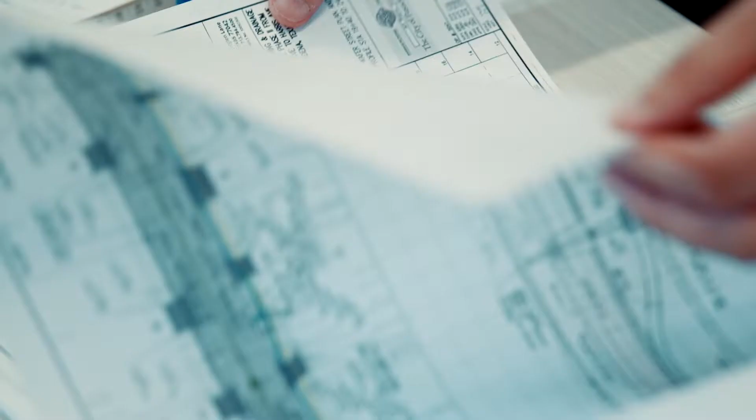Rise Communities wants to bring a master plan community that has tremendous landscaping, one-of-a-kind amenities, not to be compared to any other master plan community. It's unique. It's a community that you can drive through and feel like you're at home.

The services that Meridiana will use with EHRA is pretty much all of them: the planning and platting, the surveying, the engineering, construction phase services, landscape architecture. We're a one-stop shop, and they can use any of our services to get this project moving forward.

Meridiana is a development down at SH288 and County Road 56, and the project that my group has worked on is improving SH288 at County Road 56, providing a bridge overpass over 288 and removing the at-grade crossing for the development. Because we have so many services under one roof, one of the important things to observe in this project is the private and public collaboration.

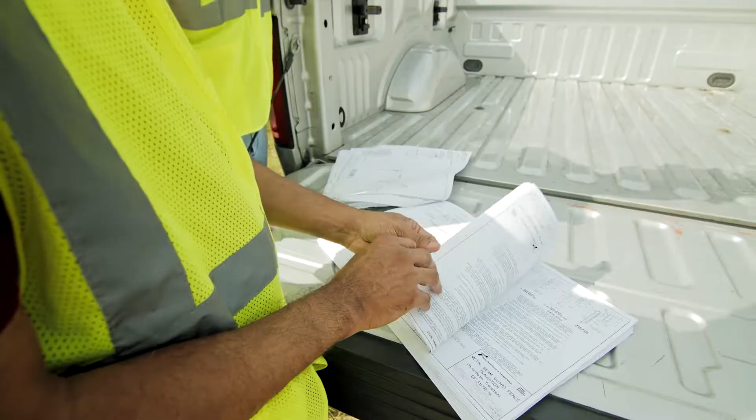Because this is a project with the developer, our land services group works with the developer day to day. We are working with Brazoria County, TxDOT, and doing this project, County Road 56 overpass over 288.

Rise Communities is looking for an engineer that looks out for their interest, as every developer should. Somebody that's going to value engineer, somebody that's going to bring a product that is going to work, drains correctly, is going to have water and sewer services, something that they're not going to have issues with in the future or currently.

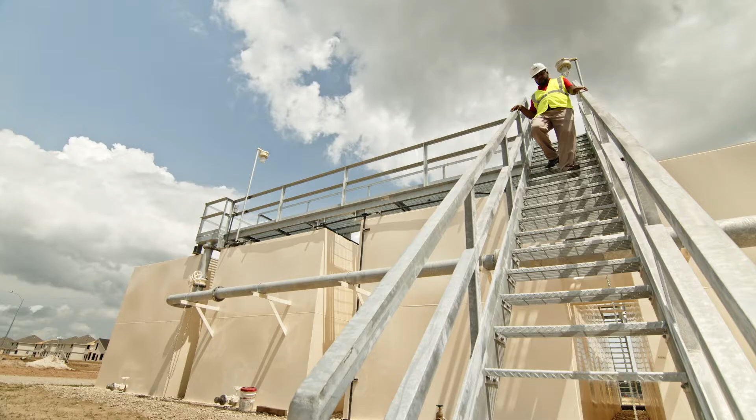In my opinion, the most challenging part of this project will be connecting our main parkway from State Highway 288 all the way through State Highway 6.

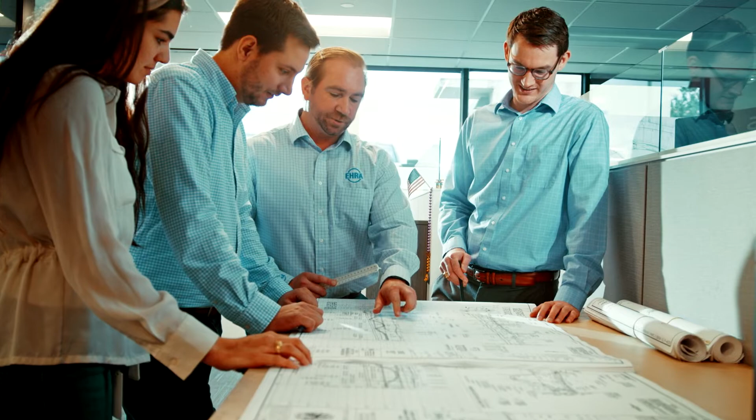I believe EHRA was awarded Meridiana because of our attention to detail and our responsiveness and our communication. Since this project happens to be in the TxDOT facility, we have to work with TxDOT. It provides not only traffic relief and connectability between 288 and State Highway 6, but it also provides safety.

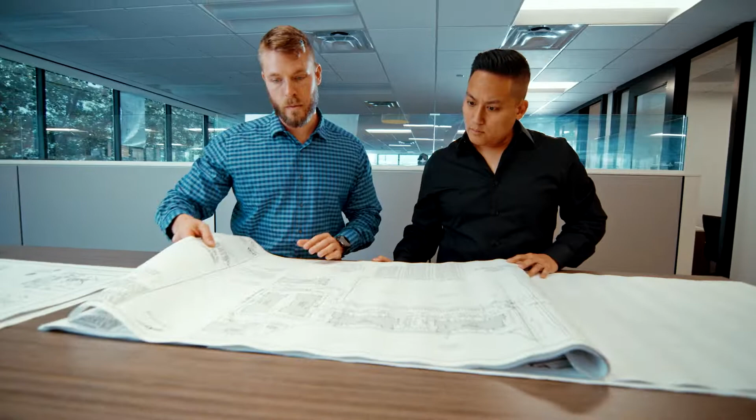I think the most challenging aspect of the project is keeping up with the trends. This is a project that's going to take several years, and you're working with two different agencies. Their design criteria isn't exactly the same, so you have to accommodate both, and really just the size of it.

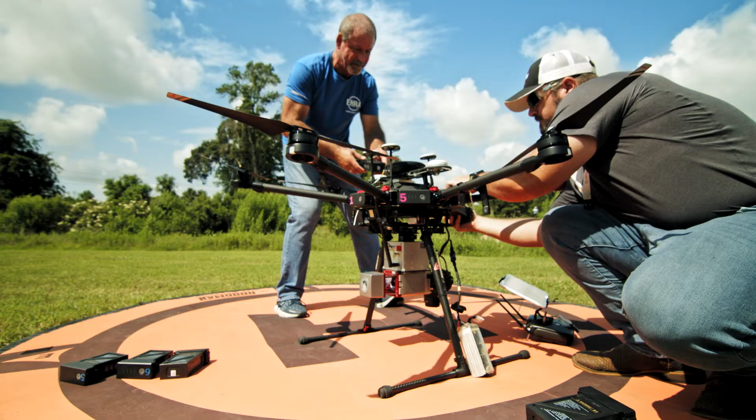EHRA will make sure that Meridiana is a success with communication. We're also going to review budgets and schedules constantly, and we really strive to make sure that communication and transparency are big keys. Instead of working for our clients, we want to work with our clients.

It's a challenging project, but I think we'll be able to execute this. I'm really looking forward to seeing the bridge design. There's so many components of this project that will have to go hand in hand in order for us to execute this. This is a complex project dealing with multiple agencies, multiple stakeholders.

I'm really excited to get this project started. It's going to be a highlight, maybe even the highlight of my career, but it'll be a very good project for us. EHRA is up for the challenge.

It's thousands of acres, it's going to take several years, and it's going to be a community like no other. But when it's completed, it will be one of the best projects in the Houston area.

I'm currently in the field and everything looks great. The progress has been tremendous, and with the help of the contractor, we're going to get this done on time. The clients are out here almost daily.

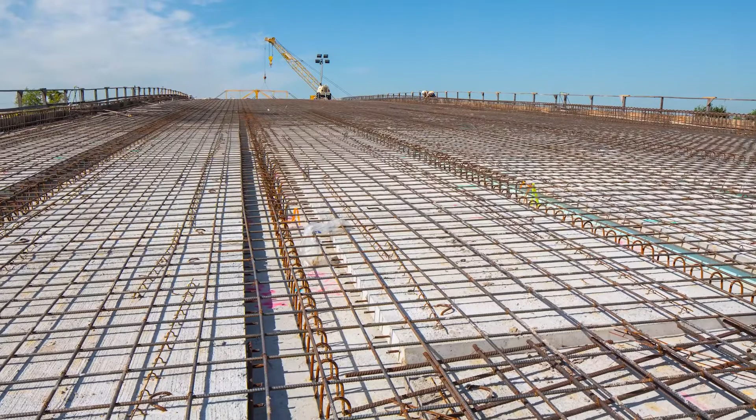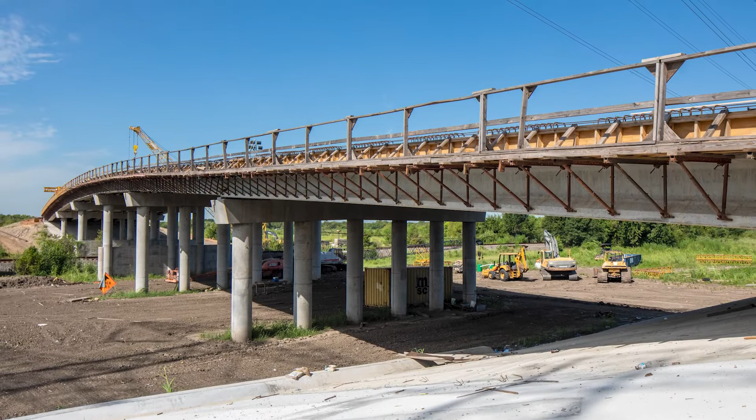There are many developers that work with Rise, and some that are pretty local. They're out here watching the development every day. There's a construction manager on the team. They coordinate with us directly, so the communication is nonstop.

So where we are in the project as of today is the contract has been awarded just like a month ago. And the contractor, as you see the equipment behind me, they're just mobilized and doing some minor pavement work at this point. So far, the project is running very smoothly.

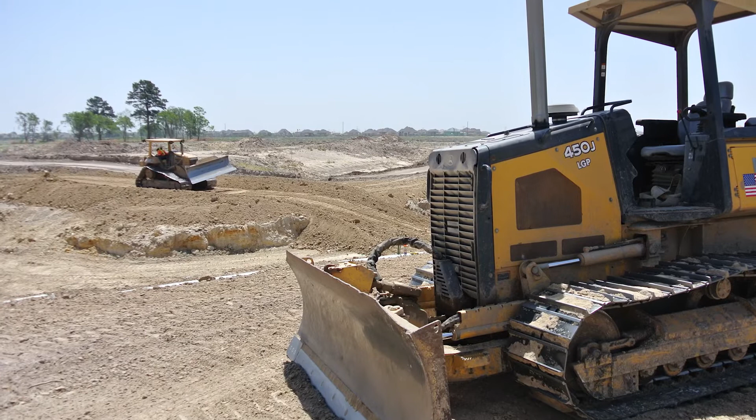The contractor's making very good progress. We're ahead of schedule. A lot of these sections that are moving forward based on what the development needs are, some of them are being pushed up forward, and we're able to meet those demands.

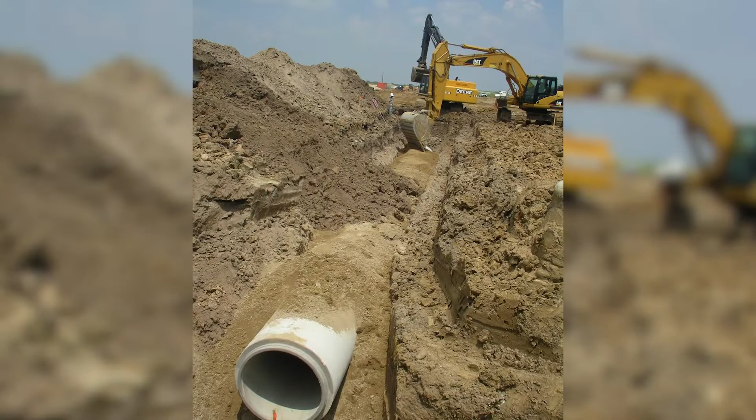Items come up and issues may come up, but we're there to take care of them and resolve any problems that may arise. At the end of the day, we're going to have a full boulevard roadway section in line with a couple of bridges, and we are also going to have some retaining walls as well.

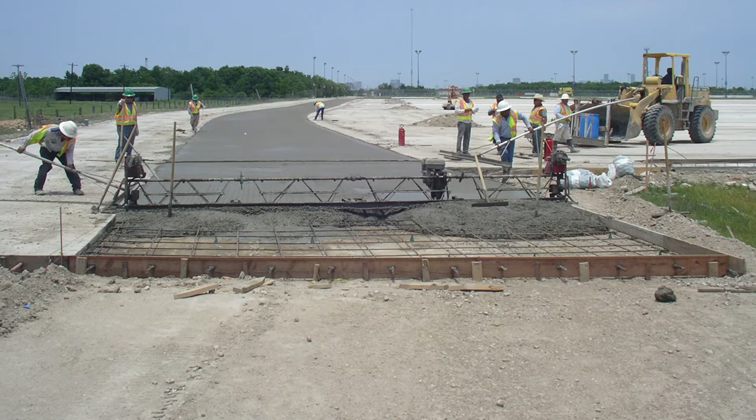Well, everything is going as planned. We have done a good job keeping everybody involved from the beginning of the project, so everything is going smoothly. I'm not expecting any major interruptions.

Meridiana is going to be one of the greatest master plan communities in the Houston MSA. It's just going to be beautiful. It's going to have Meridiana Parkway that's going to connect State Highway 288 all the way to Highway 6, 6 miles of roadway, and bridges that are going over major creeks, major canals, and it's just going to have a great community feel to it.

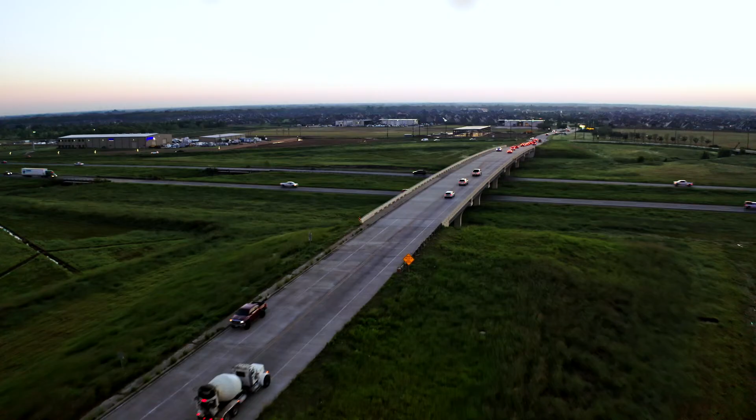EHRA's role in Meridiana, in addition to the 3,000-acre development and the internal infrastructure, all the private infrastructure, we also did all of the public infrastructure, from the bridges that connect 288 all the way to State Highway 6. We had bridges over the ditches, over the canals, over BNSF railroads, and underneath transmission lines. So working with the private and public agencies was a huge undertaking.

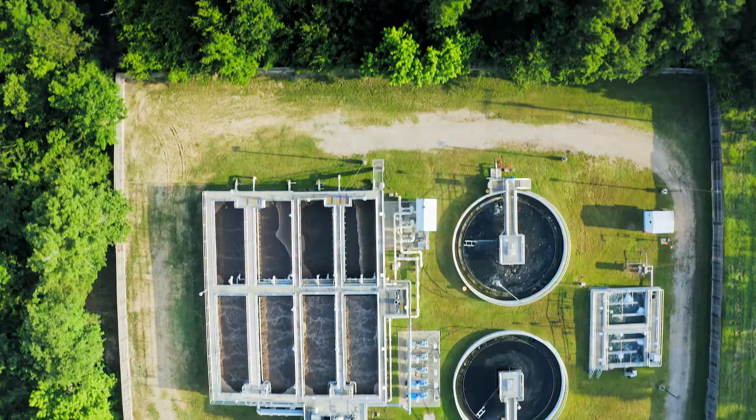We also took over the municipal utility district side of the project, and that allowed us to really manage everything for Meridiana. We are very proud of the project and the way it turned out.

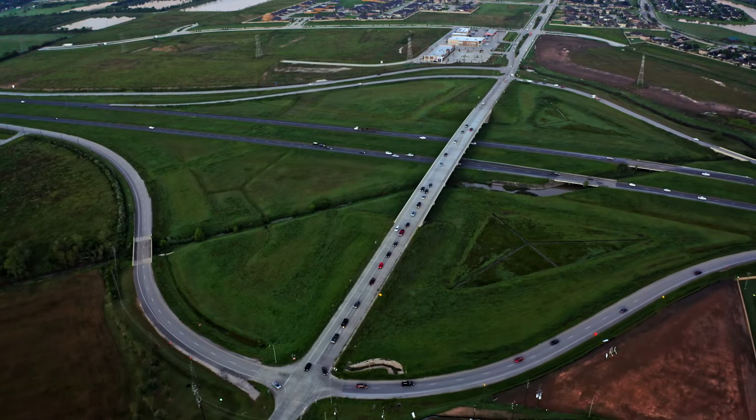The addition of this overpass really helped improve safety as well as mobility. This project was very much needed because of the safety concern. We also completed the entire parkway.

This was actually the start of something great. We were able to complete a boulevard all the way through Highway 6 - multiple bridges, multiple structures, roadway, everything.

One of the reasons why EHRA was selected for the Meridiana Parkway project is the expertise and knowledge they have, not just for the city of Manvel, but that they are a respected firm throughout the greater Houston area. Having the right team on a project of this magnitude is a huge help. They're supporting you, helping you, assisting you, managing the project with me.

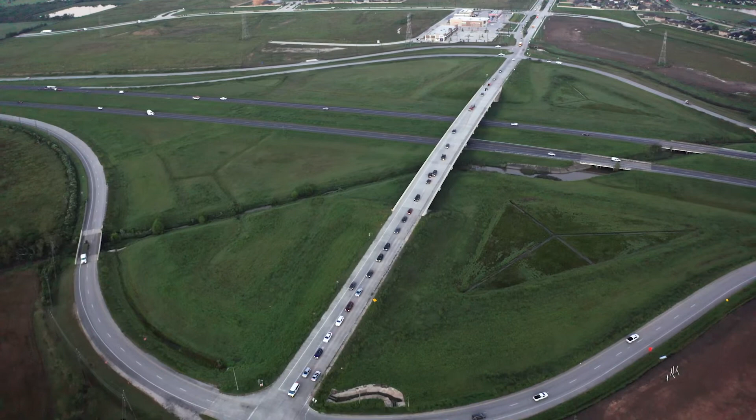With the thoroughfare connecting Manvel to Iowa Colony now, I think it's going to be a very important regional connection to make, but also just the amount of homes and commercial elements being constructed right now - there's a lot of benefit that the community is gaining from Meridiana.

The EHRA team did a good job staying focused from the beginning, making sure all the stakeholders got involved from the beginning. There are so many different aspects that go into developing a project of this size.

You don't just have the agencies, the city that you're in - you have to deal with the CenterPoint Energies, the railroads, the pipelines. There's all these different aspects and components of a development of this magnitude.

The importance of this project being completed on time was so that we could start our development from a major highway, 288, and be able to connect future residents to the community.

Meridiana has helped put Iowa Colony and Manvel on the map. They bring a lot of value to the community.

The project for Meridiana Parkway was so vital because it gives us another east-west corridor through our city. That way, for emergency response, people that don't want to deal with the traffic on 288 have a way to access other parts of Manvel without having to deal with the congested traffic.

We also wanted to preserve the natural features - there are two bayous that go through the project, so really to protect and enhance those features and then build a village around that. I think EHRA was able to deliver everything that they asked of us, and in the end, it shows.

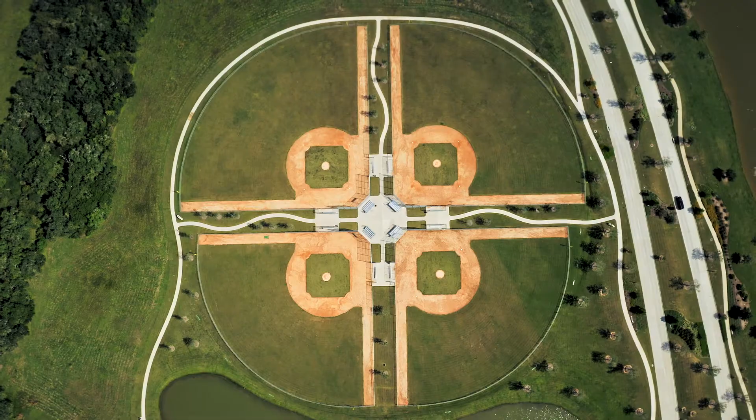The developer's biggest concern with Meridiana was schedules. They have a date set for every different milestone, and they have developments that have to meet those milestones or else they lose money. Working with EHRA and making sure that we met those milestones and schedules, we met his requirements.

I was most impressed by how fast EHRA was able to produce the product and get the project out the door, and how fast people were buying homes in Meridiana. It's one of the fastest selling home communities in Texas and in the country, and it's really grown into a beautiful community.

I'm excited with the completion of this project because of all the different aspects on this project that we've learned and been able to successfully complete.

The construction went very smoothly - we had no hiccups at all during construction. It's a team effort at the end of the day, and everyone worked together, and I'm very happy with the way it went and the completion of the project.

I would say in the end, Meridiana is really one of the best developments in the greater Houston area. I think EHRA did a fantastic job keeping up with the fast pace of development and really making sure that Meridiana could be the best that it can be.

I take a lot of pride in that because that was definitely something we were originally intending to happen, and to see it happening now is great.

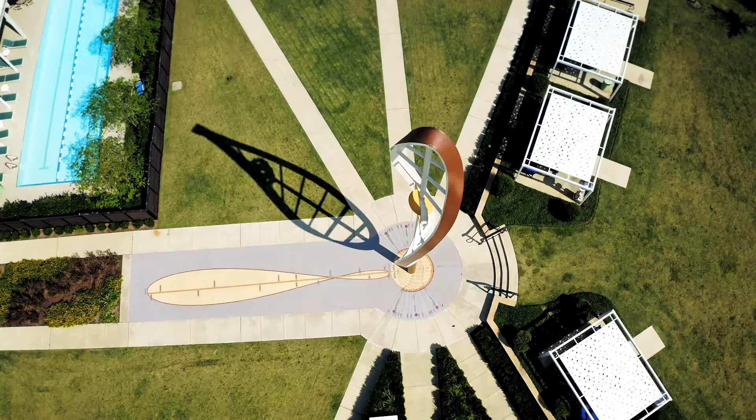Meridiana is a community that has that home feel - when you're here, you feel like you're at home. Just being out here for a short period of time, when I come out to look at the community, you see families enjoying the amenities, and that's my favorite part about it. So you build something that people can be a part of.